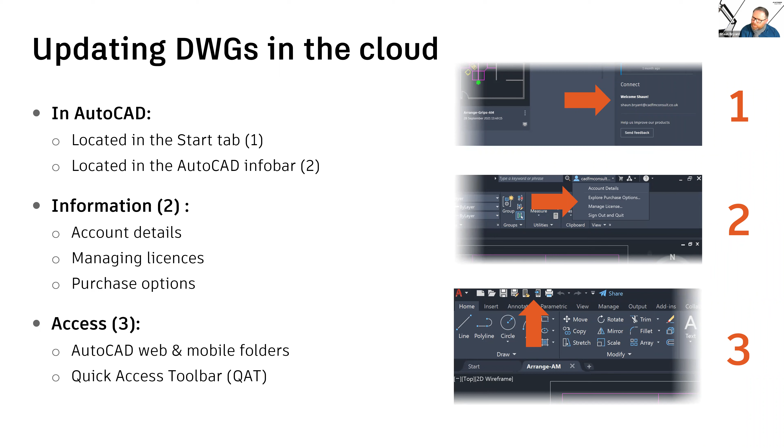Access-wise, that gives you in the quick access toolbar the access to the AutoCAD web and mobile folders. You can see the icons on the quick access toolbar - they look a bit like a mobile phone, or as the Americans say, a cell phone. There's an open symbol and a little blue arrow. The open symbol opens from web and mobile, and the blue arrow saves to web and mobile.

Let's break that down a little bit. I'm recapping a little on what we did in the last session, just to make sure you're aware of how this technology works. In the quick access toolbar you've got two commands available: save to web and mobile, and open from web and mobile.

If you haven't used them before with your AutoCAD desktop, you'll need to install a little driver - it takes about 30 seconds. The save to web mobile command saves the DWG to the allocated cloud space provided with your Autodesk ID or subscription. As soon as you're using your Autodesk ID with your AutoCAD subscription, you've got this space available to you, and you can save there anytime.

Vice versa, you can open from web mobile, meaning you can go to those web and mobile folders and open files as well. But the best bit is, because it's in the cloud, you've got synchronization with AutoCAD Web and AutoCAD Mobile. Just by using these two commands, you're making your drawings mobile - you're taking your AutoCAD technology mobile.

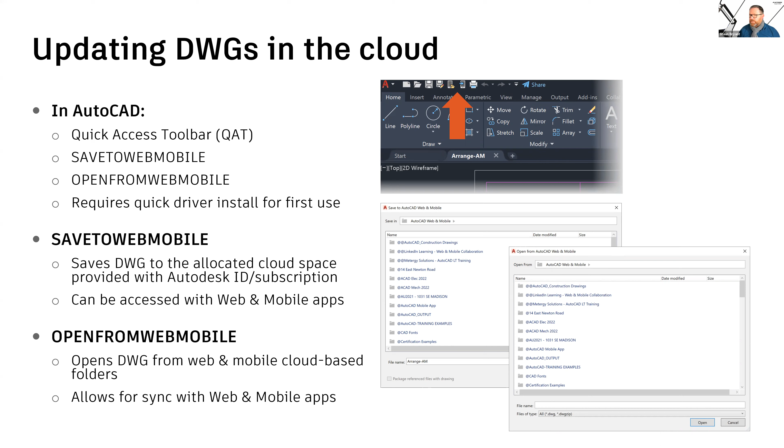So there's Save to AutoCAD Web and Mobile - that's the little dialog box that pops up when you save, and there's the open dialog too. They look remarkably like any other dialog box where you're opening and saving. The whole idea is that you're just going to the appropriate folder in the cloud instead of on your hard drive or server drive.

Once we've done that and we're working in AutoCAD with our drawings, sitting at our desk like I am now using my AutoCAD desktop app, the usual AutoCAD, what I want to do is talk about how we can add a trace to a drawing file.

I've worked on my desktop with my AutoCAD desktop and saved my drawing to the web and mobile folders. Now I'm out and about, I'm mobile, and I might have something like an iPad Pro, or let's say I go to an internet cafe and think, oh, I didn't change what I wanted to change on that drawing. You can just jump into a browser and use AutoCAD Web because you've saved your drawing to the web and mobile folders - you just need a browser.

The two main browsers that I recommend for the web app are Google Chrome and the latest Microsoft Edge Chromium. Don't go for the old Microsoft Edge, it won't work on that one. The idea is that the Chromium technology allows you to run an AutoCAD application in a browser.

So the benefit you've got there is you just jump to the appropriate URL, which is web.autocad.com, use your Autodesk ID to sign in, and you can start adding what they call traces to a drawing file. Now, the trace technology came in with AutoCAD 2022.

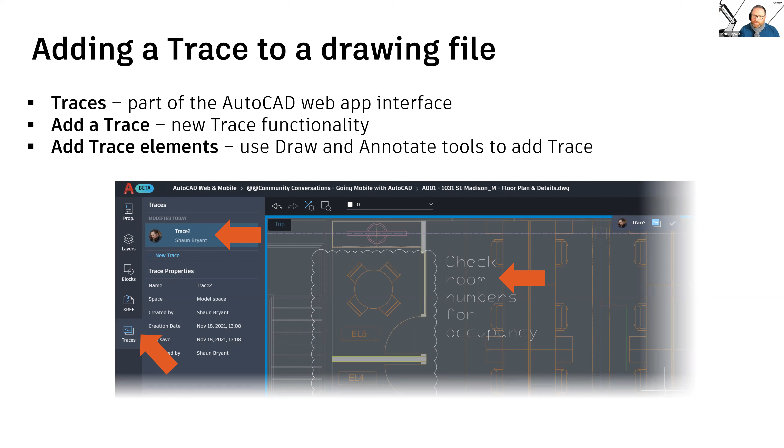And what we're going to do is basically make sure that trace is in the drawing. So we check our changes—check our revision cloud, check our text, make sure of the appropriate data in the trace, because that will apply to only this particular trace.

Now you'll notice what I've done there is I've renamed the trace as well—it's called room numbers now. All you've got to do is right click over that trace in the list in the web app and rename it. So I've renamed it as room numbers, which is a unique ID. Obviously it's a pretty basic ID, but you could number these, they could be revisions, you could have numbers, you could alphabetize it as well. And then what you do is add all the information to the trace.

You can close the trace by right-clicking and selecting close. And if you want, you can have more than one trace by clicking on the new trace option in that little area in the traces box in the web app.

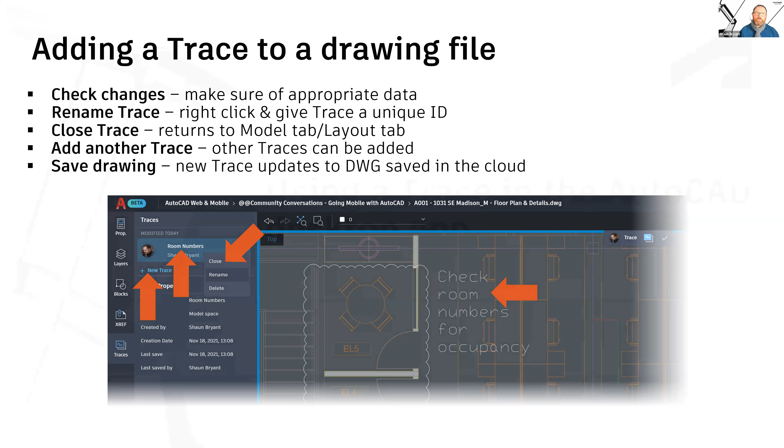Once you've closed these traces and gone back to the regular view of the drawing, look at the right-hand part of the trace area on that graphic and you'll see a little tick. You tick that to close the trace, then save the drawing in the normal way in the web app. You've got save and save as, just like in the desktop app and the mobile app.

So how do we use that trace in the desktop app when we get back to the office? We've been out on site, done all our changes, measured everything up. One of the major benefits is you don't have to think about taking paper with you anywhere. DWG is mobile, it's electronic, it's in the cloud. But how do I use a trace when I'm back with AutoCAD on the desktop in the office after spending a day out on site where it's rather cold?

So I'm back in the office with that nice warm cup of coffee, here's the AutoCAD desktop app again. What we do is open up the DWG file like you do normally, but you go and look in the web and mobile folders or the cloud provider where you saved it. So you've done a save in the web app, and that has saved it to either the web and mobile folders or something like OneDrive.

You then go to the Collaborate tab in the desktop app and open up the Traces palette. I must stress this is a 2022 function, it came in with AutoCAD 2022. So you open the Traces palette, which pops up like every other palette does in AutoCAD, and you can locate the trace from that saved drawing you just opened from the web and mobile folders that you created in the web app.

So there's my room numbers trace sitting quite happily off of the Collaborate tab. There's the Traces palette, and I just locate my trace in that list in the palette. It's that quick and easy. And the lovely thing is this is all saved in the drawing when you're making the changes in the cloud.

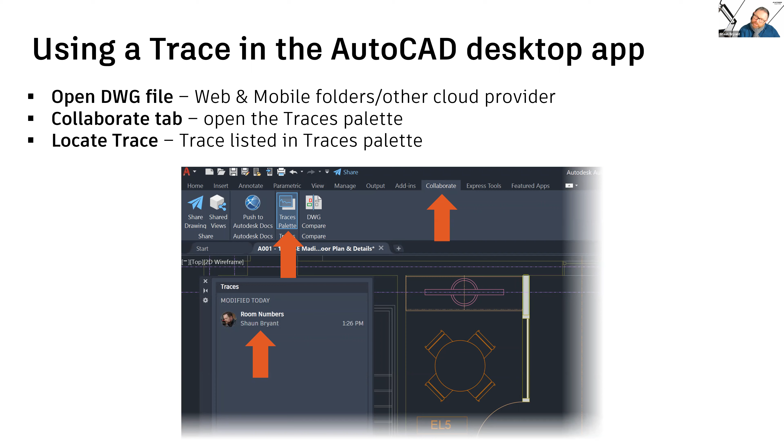So the benefit you've got as well, if you think about it, is if you've got somebody out on site working on a drawing using the web app or mobile app, those traces can be applied and saved, and then somebody back in the office can open up that saved file, check all the traces, and update the drawing accordingly if you need to centralize it.

So what we can do now is select the trace. So there it is in the Traces palette, and you'll see exactly the same information that we had in the web app. So the trace will display. Now, like I said, mine's really basic - it's a revision cloud and a piece of text.

But you could actually add geometry here as well - there's nothing to stop you. It is all AutoCAD object driven, so I could draw new things on the drawing as part of the trace. It doesn't have to be a revision cloud and a note - it could be new desks, it could be new chairs.

And you could easily update this drawing accordingly by bringing in blocks in the web app, perhaps, so you might be changing the furniture up a bit. And that trace displays, and it's highlighted in the DWG file in the desktop app.

You would then update the drawing and close the trace. Can you see there the little green tick? Once you're done, you just hit that little green tick and you then close the trace. It's that quick and easy.

Now, we can also select the trace again - there's the room numbers trace. Once we're done and we're back in the drawing, if you want to remove the trace, it's just a right click again and select delete on that little menu that appears. And again, now you would save the drawing back to the web and mobile folders or the cloud.

Can you see how this is going to develop a really cool revision trail, an audit trail of your drawings? Now, obviously I haven't recommended any sort of naming philosophies or anything like that. But if you've got a decent file naming philosophy with all of your drawings, you can see how these traces can be stored as an audit list, like revision 1, revision 2, revision 3, and so on.

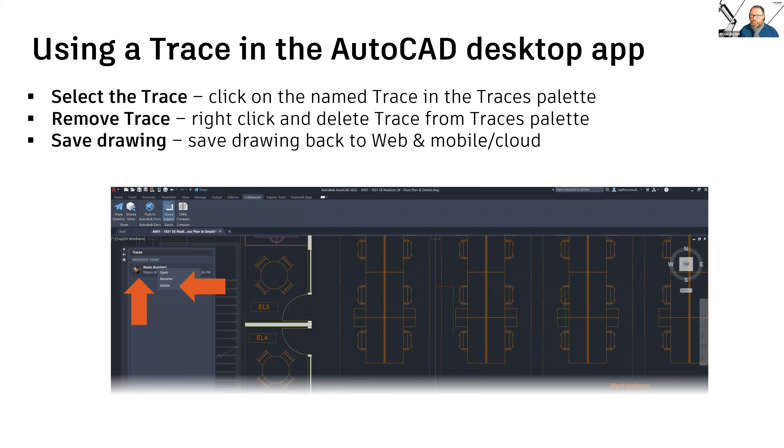So what we've done there is we've worked in the web app while mobile. We've made some changes, added a trace to highlight the changes, and saved that trace to the drawing in the web app. We then went back to base, opened the same drawing saved to the web and mobile folders in the desktop app. The traces are applicable there as well by opening the Traces palette. We made the necessary changes from what we saw in the trace, then removed the trace from the drawing.

Saved it back to the cloud, so we're now saving back to the web and mobile cloud workflow. We check the updates to the drawing. Always, always, always sanity check that all is complete. I can't stress that enough. The amount of times somebody has clicked save on a drawing, shipped it out to the client at 5 p.m. on a Friday, and then Monday morning it's like, what is this? What have you done to my drawing? It happens. So sanity check everything and save the file.

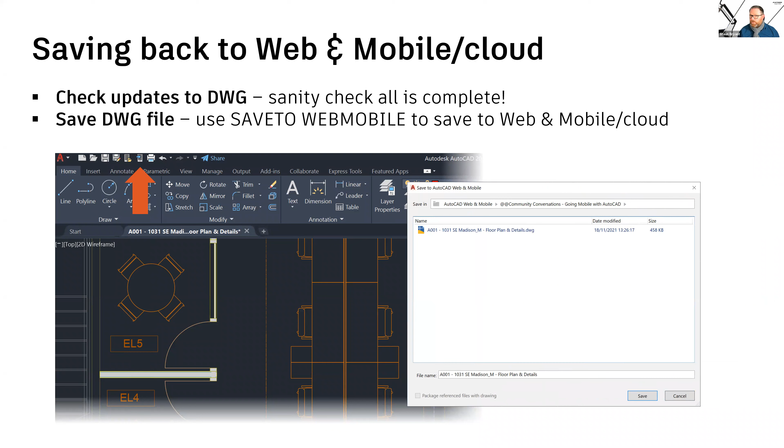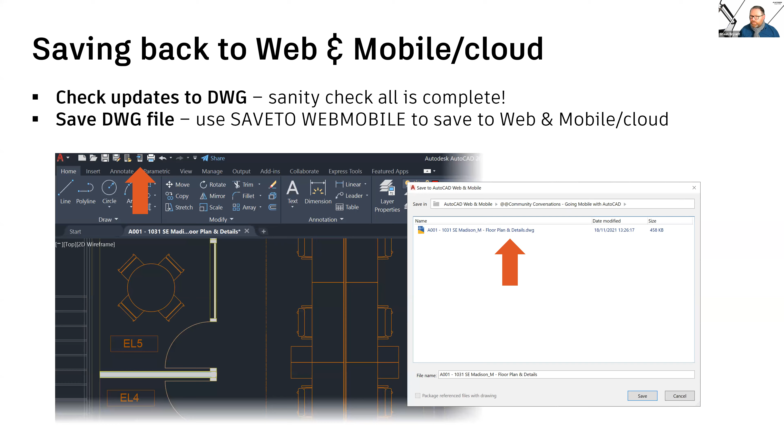That's where you're using the save to web mobile command to save to web and mobile, or the cloud. Now, you wouldn't use save to web mobile if you were saving to OneDrive, for example. You'd just save it to a OneDrive folder using Windows—quick and easy. But the idea is that you're saving using that little icon in the quick access toolbar, saving the file to your web and mobile folders in this case. So there's the file, you can see the date it was modified. Hit save in the little dialog box, and we're done.

Next step along, we go back to the web app. We might be out on site again, and we open the revised DWG file. We go to the traces, and you can see in this case that the drawing has been updated and the trace has been deleted because there's no traces in the drawing in the web app. So it's that quick and easy—you can do it in the same time I've just gone through it in this slide deck for the presentation. So there's the drawing again, the DWG file, but this time there's no traces there.

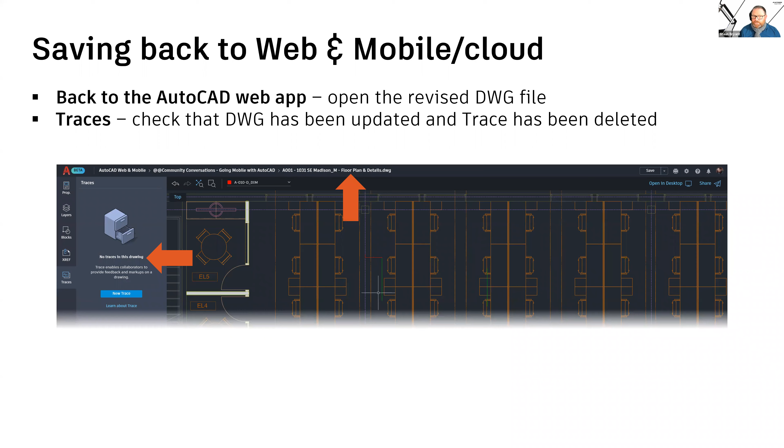And as you can see, no traces in the drawing. I can create a new trace if I want to.

Now, what I want to do just quickly—this is a bit of a quote from my Autodesk University 2021 class on going mobile with AutoCAD. What I'm going to do just after this slide is jump into the AutoCAD desktop app and the web app for literally 10, 15 minutes before we jump into Q&A and questions.

What I want to get across here is that the mobile technology, when you combine that with things like the web app and the mobile app, gives you incredible mobility. And that mobility utilizes that core AutoCAD technology. You'll see that in a moment when I show you the web app and jump into AutoCAD, because I want to show you how these workflows are pretty much seamless.

The benefit you've got there, you don't have to be the one person. You could have somebody working on the desktop, somebody out on site in the web app, in the mobile app. They could be making changes and adding traces to the drawings out on site. You are then seeing those in real time when they save the drawings, and you can automatically work on those changes.

Now, when I was a CAD manager, we used to literally have to print off the drawings, put them in a plastic tube with the strap—I'm sure you all remember those—take them out on site, hold them down on the car bonnet, or the hood as you guys call it, and hold it down with bricks and get a red pen out and mark the drawing up.

I can now just turn up on site with an iPad—that's it—and my little Apple Pencil, make the necessary changes, add the traces, thank you very much, and that goes straight back to the office in the saved drawing.

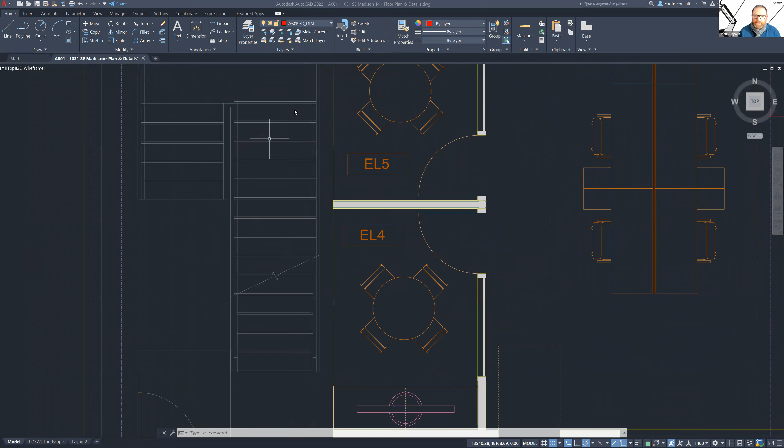So we've got a couple of small conference rooms. We've got EL5 and EL4. Now, we don't know if those are the appropriate room numbers or not. So what I'm going to do is just make sure that I'm zoomed in on that area.

And then I'm going to go up to the little save to web mobile there. You can see that the tooltip pops up on the quick access toolbar. Now I've got access to that because over here, top right, you can see that I'm logged into my Autodesk account. And that's what I said about earlier in the presentation: obviously using AutoCAD 2022, you've got to be logged in with your Autodesk ID anyway to get into the software. So I'm just going to quickly save that.

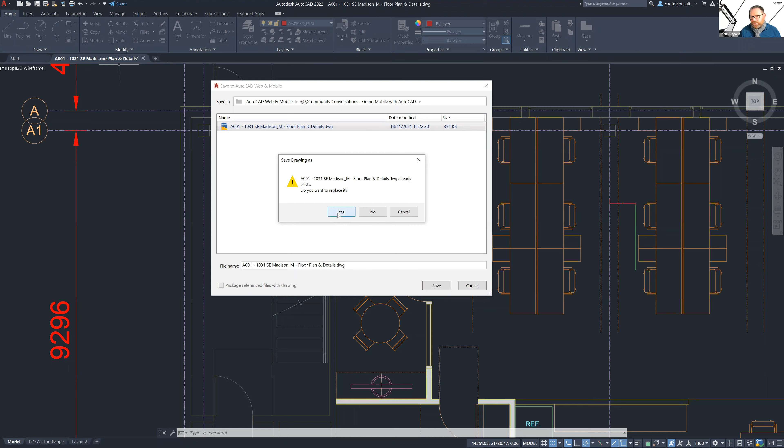So I hit save to web mobile, and I make sure this drawing goes into my folder in the web and mobile folders. You can see the dialog box is saying save to AutoCAD web and mobile, and there's my community conversations subfolder. I'm just going to save over the existing drawing in there, so it'll prompt me for a replace like so, and yes to that. That's absolutely fine. So that's now saved on my desktop.

So I pack everything up, put my iPad in my bag, or you might even take one of the smaller form factor laptops with you as well. There's plenty of those out there now. You might have something like an iPad Pro, which is a great tool to use both AutoCAD Web and AutoCAD Mobile. So the drawing is saved.

I'm just going to stop sharing now and I'll jump into the web app. This is why I do this, so I can jump in and out of each one. And surprise, surprise, you might recognize that screen from the slides a moment ago.

I'm now in the AutoCAD web app and you can see that up here, there's the URL like so. We've got web.autocad.com. And when you log in, it then says acad/me, as in me, I'm logged in. And there's AutoCAD web and mobile. There's my OneDrive link there. So if I go there, there's all my folders on my OneDrive, for example.

So I'm going to go to my community conversations, going mobile with AutoCAD folder. Now, this is the drawing I've literally just saved in the desktop app. So you can see there, if you look at the date, it's today's date, and I saved that at about 4:28 p.m.

UK time. So all I've got to do now is click on the link, and that'll load up.

Bear in mind, we are using the power of the modern internet. I've got a reasonably quick connection here in my office based at home right now. But if you're using something like a cell phone signal for your internet, this could take a little bit longer to load, and we are restrained by that kind of technology to a certain point. But the one thing I will say is we've got the advent of 5G and all that kind of stuff kicking in. It's making everything more mobile and more accessible.

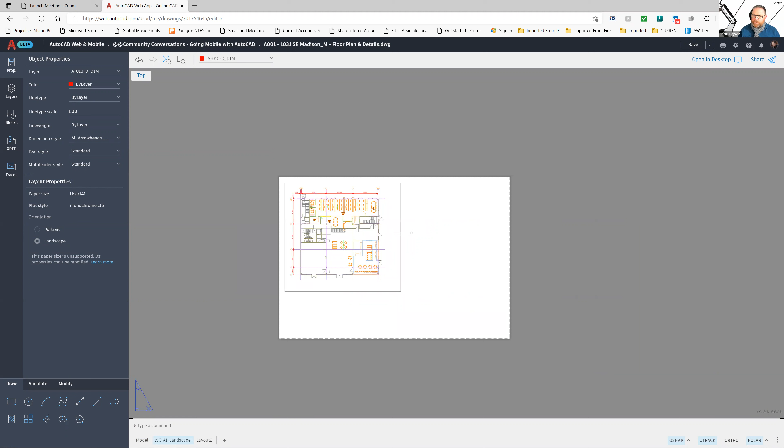So I'm in my layout tab. You'll notice I've also got my layout tab. So there's my layout tab there. If I zoom out slightly, I'm using the same core AutoCAD technology. There's pan, and if I roll up and down on the wheel of the mouse, I can zoom in and out like so. So I'm going to jump back into the model tab, which is where you should be when you're doing your design work.

We were talking about making the changes and putting a trace on the drawing so that people can see those changes that have been made. So what I'm going to do here is make some changes to the text. I'm going to zoom in a bit. Again, as I always say in all my AutoCAD training courses, zoom is there for a reason. Don't squint at your screen.

There's the text. I click on the text like so, and I can edit that if I want to. I can double click on it. And there's the text there.

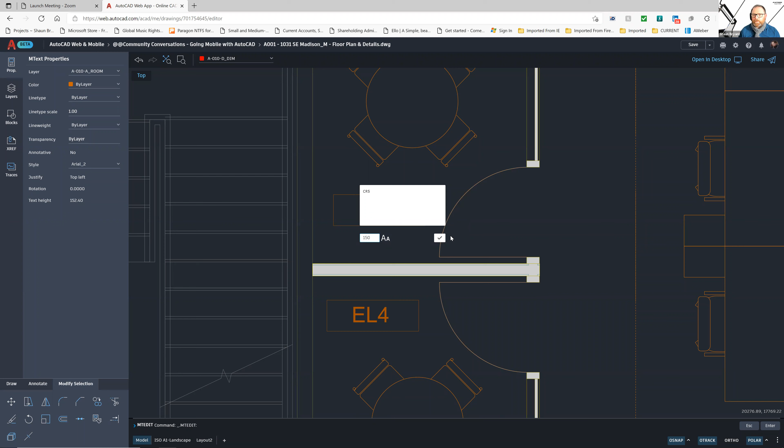Now the interface is obviously different to the desktop app. That's just the way the browser works. So instead of getting your little ribbon at the top of the screen where it goes into the text editor, what we've got here is EL5. These are meeting rooms, these are conference rooms. So what I'm going to change it to is CR5, conference room 5. I'll change the text height there, let's go for something like 150, just round it up. Click on the little tick, and there's CR5. So I've made a change to that particular drawing.

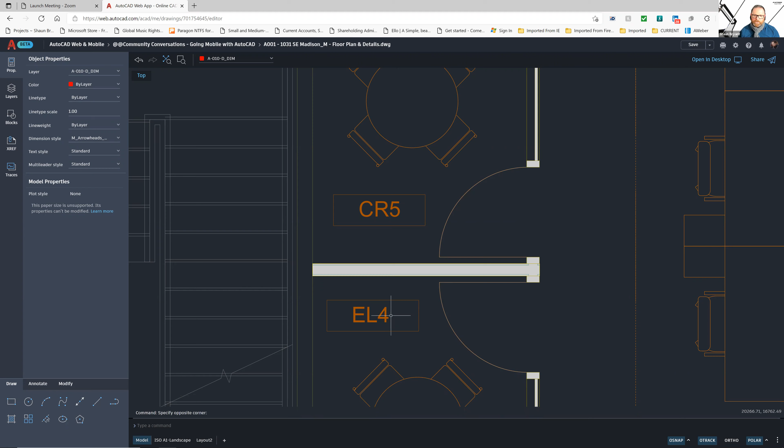Let's do the same with this bit of text here. Again, just a double click, same old technology. Let me just hit escape a few times there. I think it was still in the command. No, it's not liking me. Okay, I'll leave that one for now. I think that might be just my browser playing up a little bit there. Yeah, I'm just going to leave that one for now. But as you can see, I've made a change to the drawing. That's the important bit, that's what I wanted to do. So that change has been made.

I now go to traces here, like so. And like in the PowerPoint slideshow, we have no traces at the moment. So I click on New Trace, and you can see the screen changes quite dramatically. What we're doing here, the only way I can describe it, if you've ever used a drawing board, it's a bit like putting an acetate sheet over an existing drawing so that you can add some traced information on top. It's literally that workflow, but electronically in a browser. It's very clever, and I love it.

For me, as I was saying to Sean Hurley earlier, if I'd had this technology like 20 years ago when I was a CAD manager, wow, we would have been one of the most productive CAD departments on the planet. I think it would have been great.

So there's my trace, and as you can see, I've got a basic trace, Room Numbers, right now. But what I'll do first is jump down to the Annotate tab in the web app, and there's my little revision cloud icon. I click, come into the drawing area, and I'm just going to go down to arc length. Now I can do that here by coming down to the command line and clicking. I'm just going to change the arc length there to something like 250 millimeters—it's a metric millimeters drawing—and press enter.

And then I'm going to select a rectangular revision cloud. So I'll click a point about here, drag the cloud over those 2 conference rooms and click again like so. Now, as you can see, I'm just placing AutoCAD objects in the trace. And this is what I love about this trace technology is you're not having to redline or mark up per se.

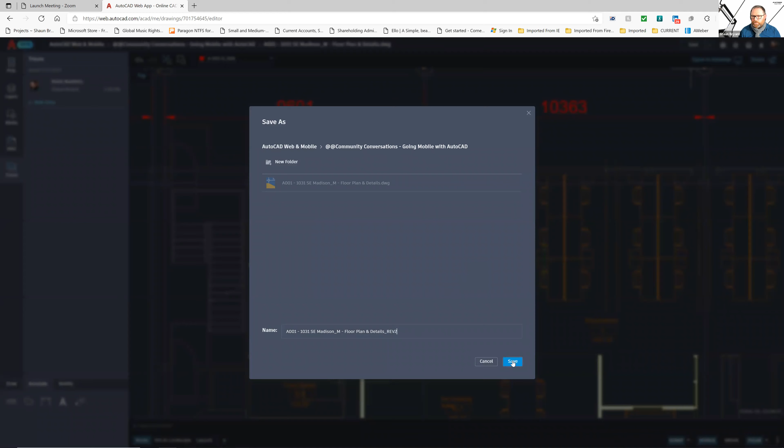And what I can do now is I'm just going to save the drawing. So what I'll do now is let's do a save as, so there's the little arrow, click on save as. And what this will allow me to do now is obviously give this a different revision. So let's say it's Rev2, like so, and I'll save that. So that's saving that file now quite happily to the web and mobile folders as revision 2.

So that's in place, and if you look up at the top of the screen now, you can see there you go, there's the Rev2 suffix just there. So I've now saved that file.

So what I can do now is literally log out of the web app and I can go and find this file in my desktop app. So what I'm going to do is jump over here. Just before I come out though, there's that share option I mentioned.

While I remember, you can share a link to this drawing at any time from the web app. You can send a view only link or an edit and save a copy link. There's the link there, and you can just copy the link and put it into an email and send it to somebody. It will allow them to view only via the web app, or edit and save a copy via the web app, which is quite useful because it allows you to collaborate with other people who might not have a full desktop version of AutoCAD.

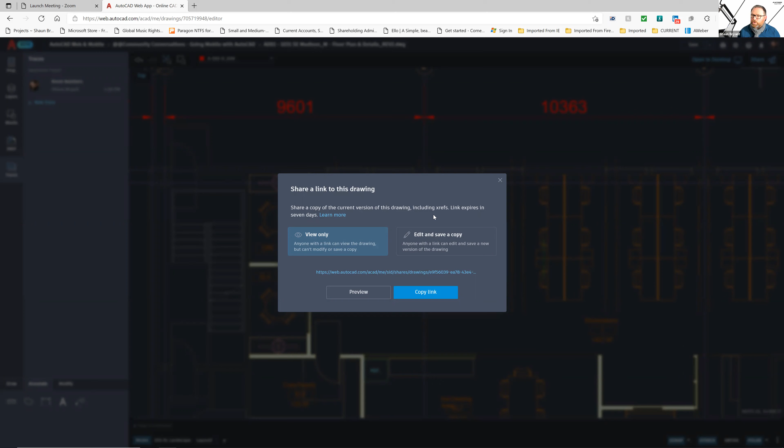Just close that for the moment, and what we'll do now is log out. So there's my little ugly mug top right, so I'll sign out of my account, and there we go. We're back to the URL screen where you would obviously go and log in to the web app.

I'll just stop the share again, and again we're going to share my AutoCAD screen. So we're going back into the AutoCAD desktop now. So what I'm going to do now is I'm just going to close this file because that's the old one, I don't want that one anymore. So I'll just click on close, get rid of that one, and we'll go up to the icon here where I can open from web and mobile.

So I'm now back in the office, back at my desk using the desktop app. So there's my community conversations folder in the web and mobile folders. So I'm just going to click on open, and surprise, surprise, there's my revision 2 drawing. And as you can see, it's dated, time tagged. So you can see it's the newer version because it's obviously Rev 2, but also you can see the time there, 16:35, 7 minutes after the drawing that I opened in the web app earlier. So let's open up Rev 2 like so.

This shouldn't take too long to open, I hope, bearing in mind I'm on my desktop. So there's my desktop, and you can see there's the change I made, CR5, like so.

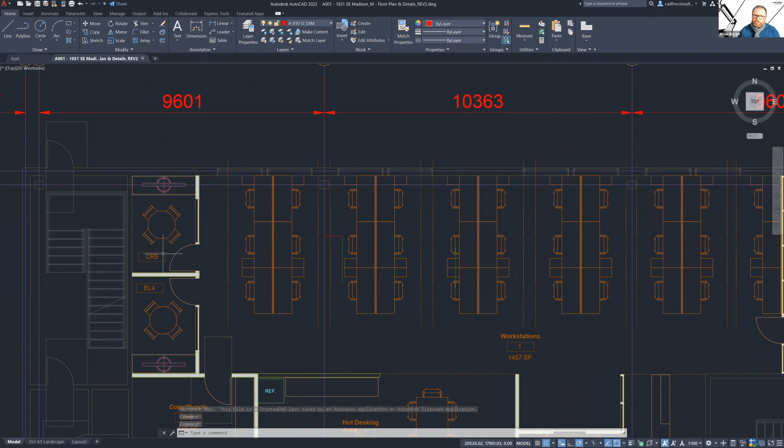Now what I do is jump to the Collaborate tab, click on Traces palette, and there's my room numbers trace. I'll pop that over here, and when I select that trace, there's my Rev Cloud, and there's my check room numbers and IDs.

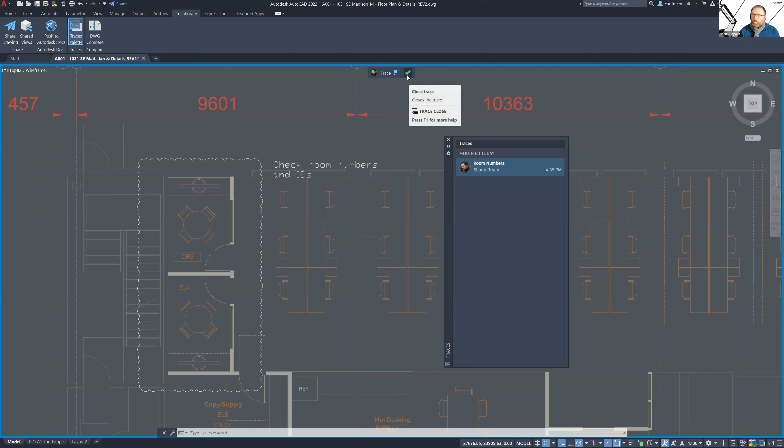I don't need that trace open to check the room numbers and IDs, so I'll come out of the trace once I've checked the changes, and then make the necessary changes like so. Let's change that one while we're here - I'll do that in the desktop app. Let's just change that quickly to my CR4, which I tried to do in the web app earlier. There we go, that's better.

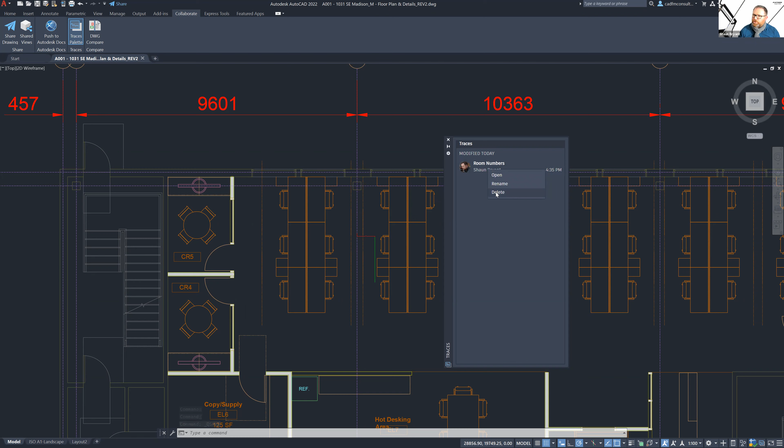So what I can do now is save that like so. That is saving back to that web and mobile drawing just by clicking on save. I've done the room numbers trace, so I can right click on it and delete that one - it's finished, it's done. Now it's saying there are no traces in the drawing, so I can close the traces palette. I'll just do another save to make sure I save that change where I've deleted the trace, but I've also updated the room numbers and the IDs.

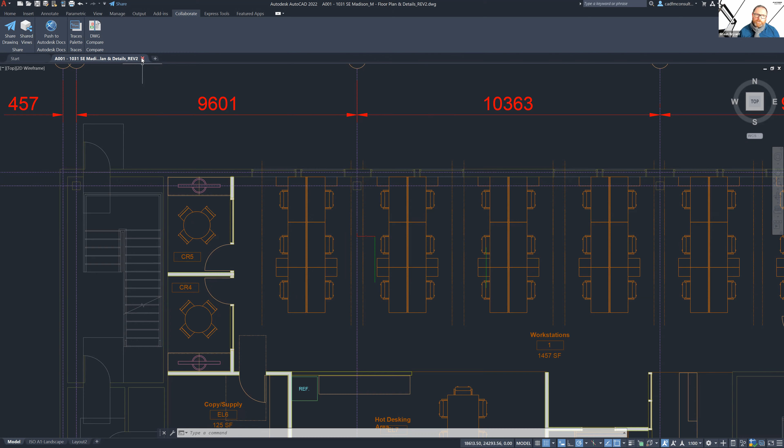So what I need to do now is jump back into the web app to see whether those changes have been made and whether that trace has been removed. Apologies, it's another stop share, but I'm going to close the drawing as well to prove there's no smoke and mirrors going on here. That's done, and what I can do now is stop my share in Zoom.

Share screen - there's my web app, and I'll click on share there. I'm going to sign in, going out on site again, signing into the web app. I'm not too worried about anybody seeing my email address because everybody knows it anyway, and fortunately you don't get to see my passwords. I'll log in again, and that will take me back.

You can see there, I'm logging into the AutoCAD web and mobile folders. There's my community conversation subfolder, there's my revision 2, and you can see the time date has changed again, where I've saved it in the desktop app. If I go into the drawing again, it will take a few seconds to load up - this is all just due to internet bandwidth, give it a few seconds to load, it shouldn't take too long. But at the end of the day, I'm just at the mercy of my internet speed, as we all are.

As you can see now, they've updated in the web app. There's my CR4 that I changed in the desktop app, and you can see there's no traces in the drawing. I've made the necessary changes in the desktop app, removed the trace, saved the drawing to the web and mobile folders in the cloud. I'm now back in the web app in the same drawing with those changes made. That's how quick and easy it is to work and collaborate with the web app using AutoCAD.

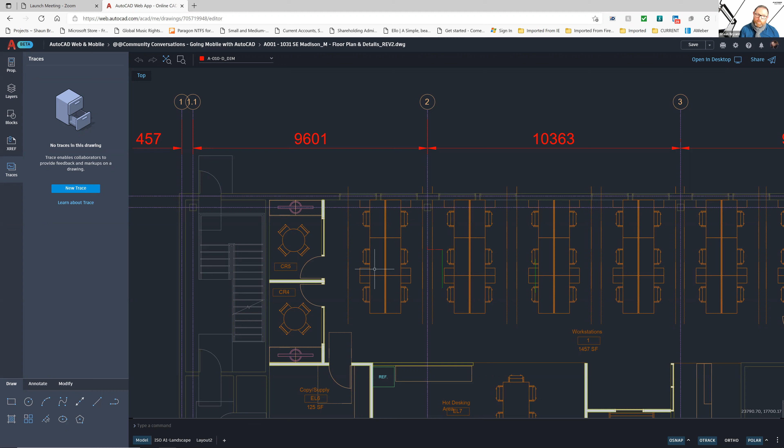So what I'll do now is jump out of all the technology, and we'll jump back to our PowerPoint.

And hopefully you can now see my little quote that we talked about earlier. Excellent, so there you go - that's part 3.